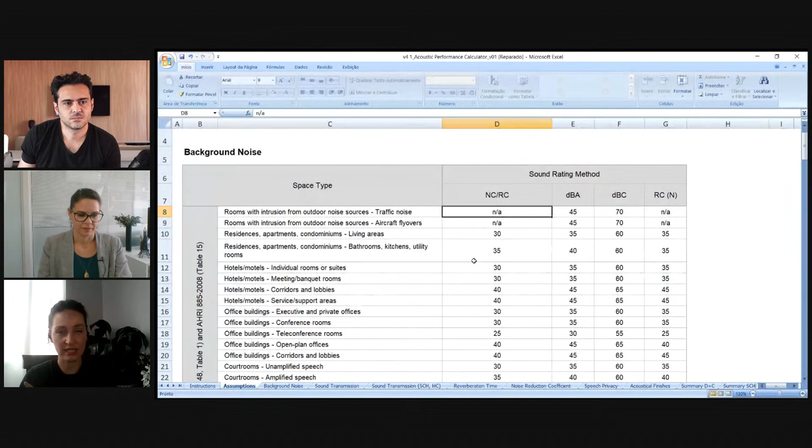So it gives you background noise, sound transmission, acoustic isolation. I'm going to go quickly through this tab so we can go on. Reverberation time, this is something that we are going to work with today. Speech privacy is related to reverberation time. And acoustic finishes, because it deals with the absorption or reflection characteristics of the surfaces. Acoustic finishes and the design coefficient, so they already give you this relationship with the type of space that you have.

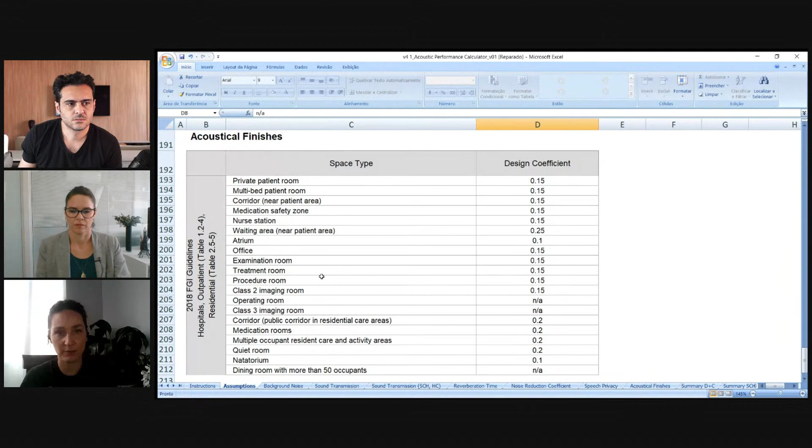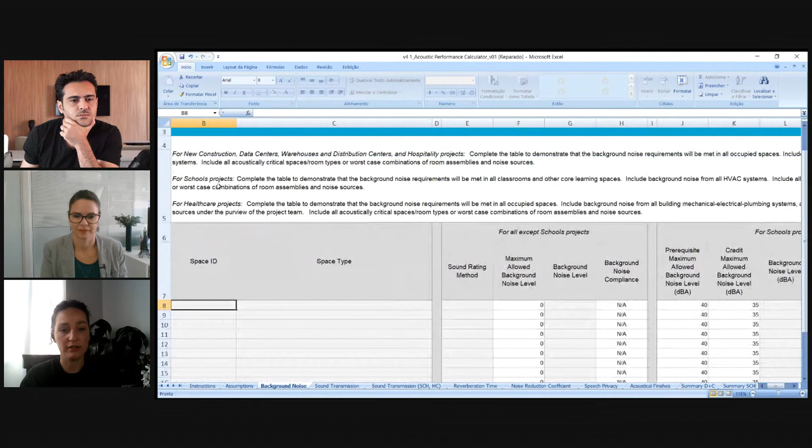So if you need some idea of what you're searching for, you can find it here. It's already in this calculator; you don't need to look further if you don't have to. And then we are going to talk about noise reduction coefficient. First things first, background noise. What is background noise? It's all the noise that you hear aside from the source that you want to hear. So it's the traffic, it's the air conditioning, it was that problem with Sammy's microphone, and so on. So this is background noise.

If you are designing in a place that already exists, you might want to measure the sound intensity in that place, so you can have an idea of the background noise. But if it's a new project and you are developing this along with the architects and the other teams, you can count only on the HVAC background noise if there is an HVAC system. And this is what I'm going to show you. Where do you find this information?

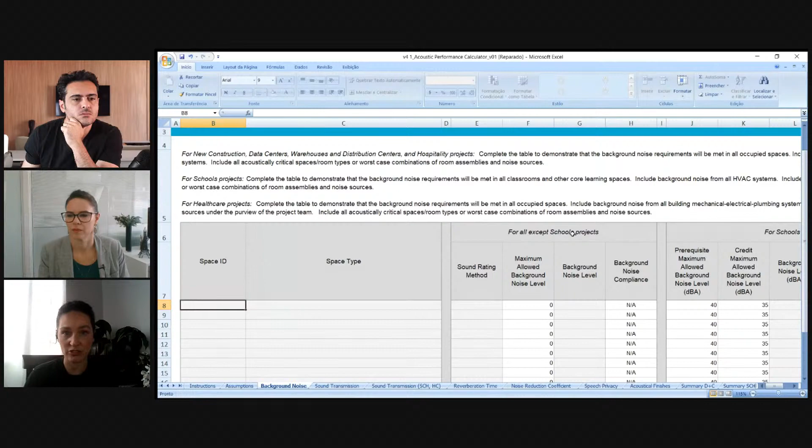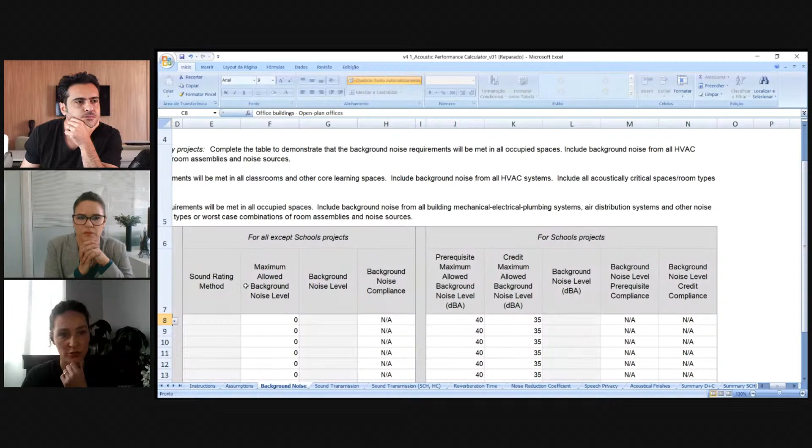So what we are going to do here, it asks for a space ID. So we are going to use Office 1, for example. What is the space type? The space type is office building, open plan office. So if we see it, we already have here some levels, but this is for schools. It has already filled in for schools, but not for the other projects. So let's move on.

Just to let you know, guys, right there where Tiziana chose office buildings, open plan office, usually when you download the calculator, you will see a drop-down menu with all the options. It's not appearing on screen because we're sharing the screen, so it doesn't show the same way for us.

But anything that shows there with the little arrow on the side, they will have a drop-down menu and you can choose from it, okay? So she is choosing from a menu. Yes, it starts with rooms with intrusion from outdoor noises and traffic noise to residences, hotels, office buildings, and goes to performing art spaces, hospitals, and laboratories, okay? I will describe it to you then because I wasn't aware of it.

You should share your screen itself, not the software. Maybe it will appear in the drop-down menu. Stop. Let's try again. Share screen.

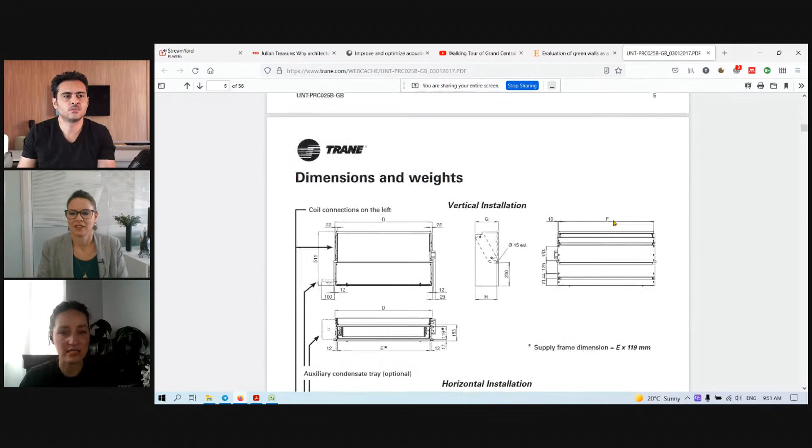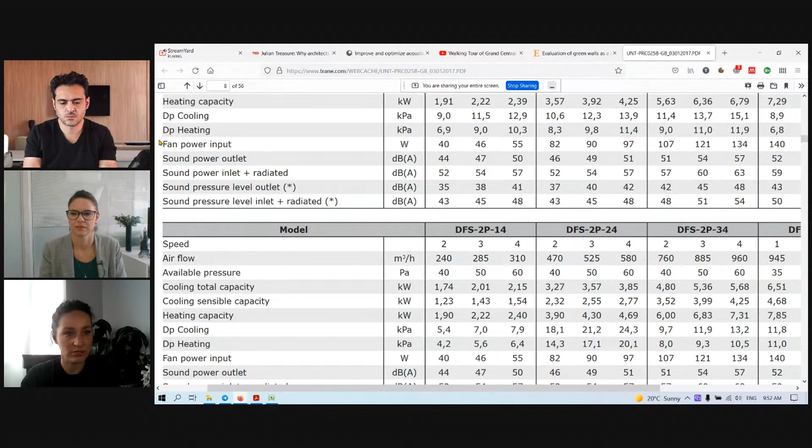Okay. So this is just an example of an HVAC system. Of course, you will have to talk to your mechanical engineer to see what type of unit you will need and the capacity of this and so on. But you see here, I'm going to make it larger. It says sound pressure level outlet. So this is the sound pressure that we are aiming at. It's in dBA, as I told you before.

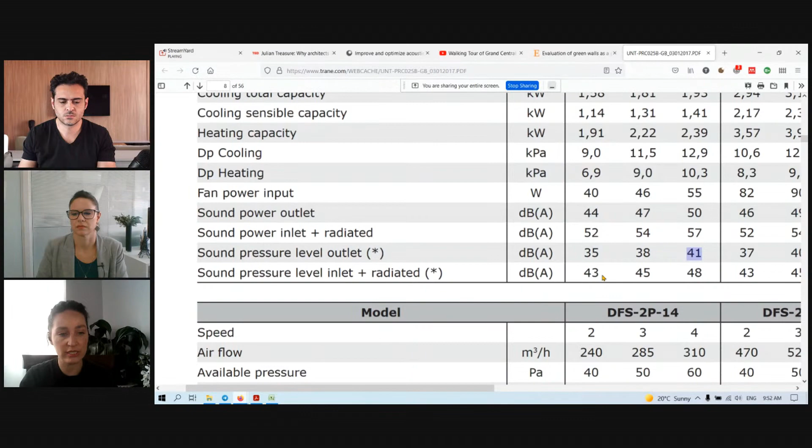And there are 3 types of units here, from 35 to 38 and 41. Okay. Let's choose 41 because we need a stronger unit, and we are going to put it here. Do you see my Excel file? Yeah. Okay, so 41, and it already says to me that the background noise is okay for that place. If it were 48, it says no, because it's too much background noise. It will make people uncomfortable.

Okay, so this is something important that you talk to the mechanical engineer about, because sometimes people are really concerned about thermal comfort and energy efficiency, and they don't think about the discomfort that that unit will cause to people. And when it's too loud, they will turn it off for some time because they need some peace at that moment, and then it will unbalance everything that was simulated and calculated before.

Okay, so this is one thing that you should have in mind. Acoustics is about comfort, it's about quality of life, but it also can unbalance all the calculations that you did for thermal comfort and energy use. Okay.

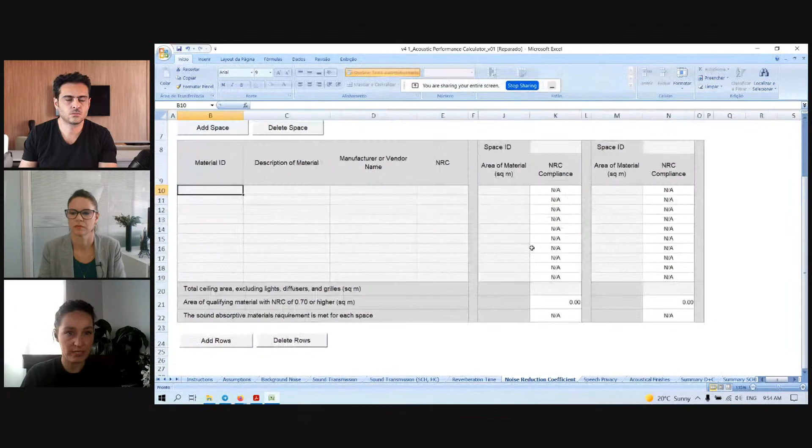Next thing that we are going to talk about is, of course, the noise reduction coefficient. We talked about the ceiling property. Okay. And this is where you put the ceiling characteristic. Okay, so you put here office 1. Is it okay to read? It's okay, yeah. Okay. And then you put ceiling X.

This is a mineral ceiling, and then you have the name of the product and the type of product, which comes from manufacturer X. And then you need your noise reduction coefficient, which is that average coefficient from all those frequencies that I talked about. Okay. First things first, we already know the area of the ceiling that we are going to apply. Let's say it's 49 square meters.

It can be less if you're doing a composition in the ceiling. It's all right. You just put more area, for example, 20 here, and then ceiling Y here, with 29. Okay, and then we have 49 square meters, and you can make this composition. Okay.

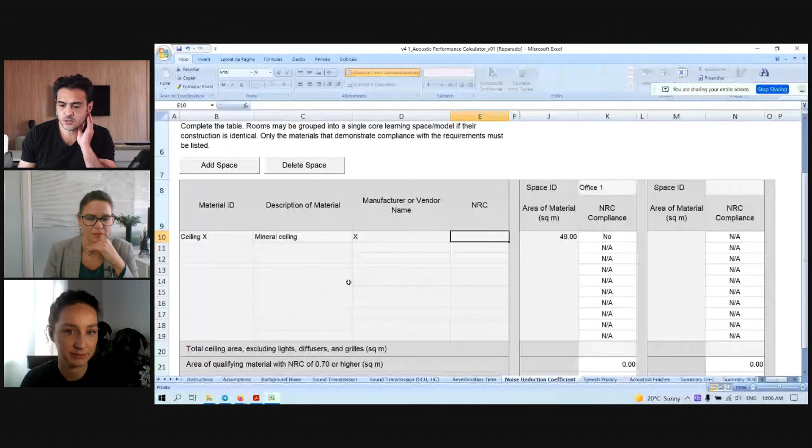All right. So while I share my screen here, Felipe, can you choose one NRC for our calculator? Do you want me to choose from this manufacturer? Yeah. Okay, I will choose the first one here because it's 0.75, so we have more chance to win the challenge, right? I don't want to be shameful to our students here. Okay. Do you see the calculator?

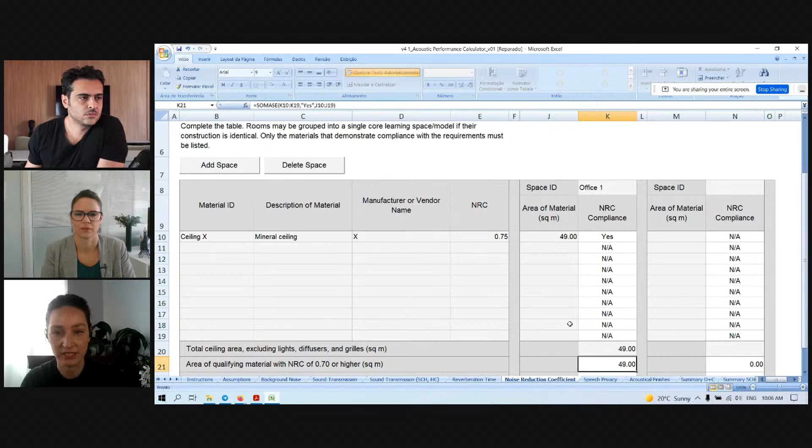I'm seeing, yeah, fine. Okay, so I wrote here the one that Felipe chose. We already had the ceiling area, and then there's something missing because it's not complying. If I put here the ceiling area, it says that it is compliant now. So I have the whole ceiling area with a good noise reduction coefficient, and the calculator is telling me that I will have theoretically a good acoustic performance in that room.

Why do I say theoretically? Because people are people. When we do energy simulations, thermal simulations, comfort, whatever, we are dealing with assumptions, right? So if someone puts a car outside with a subwoofer, then it's a little bit more complicated and hard to predict. Okay.

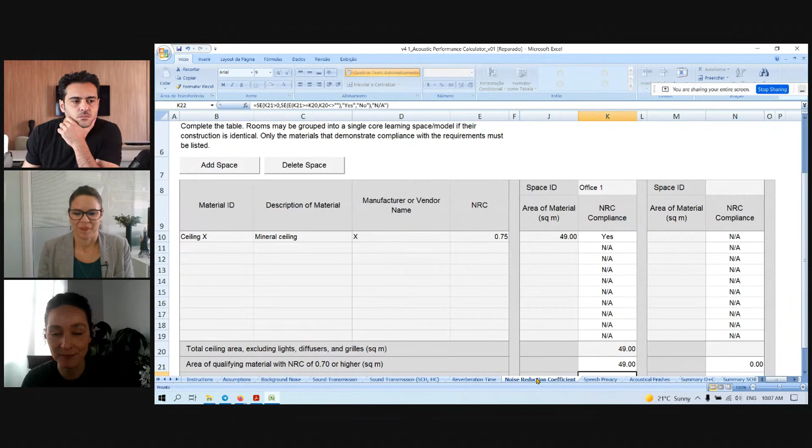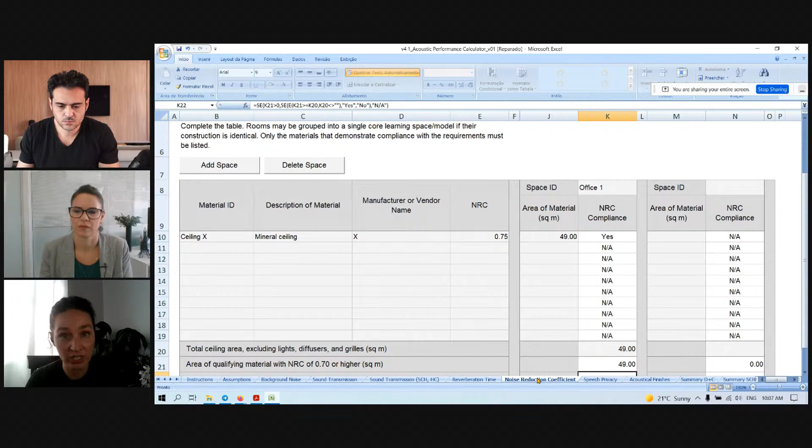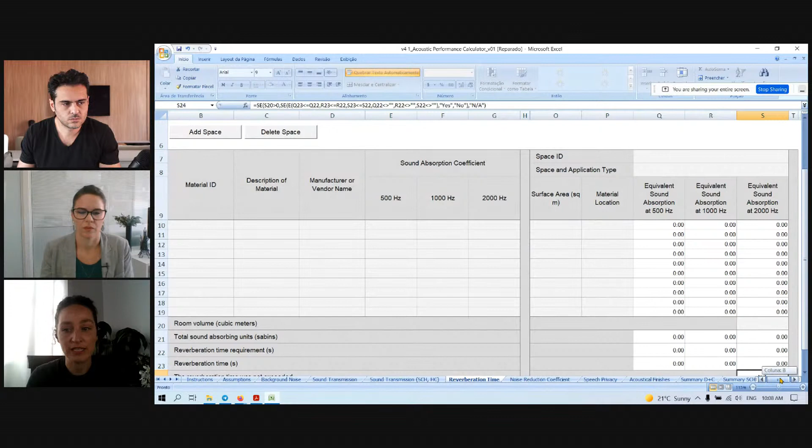All right. And then, as Felipe told you, maybe you have a larger room and maybe you have to deal with reverberation time. So how do we do that? There is a tab here for reverberation time. Okay. And then we already chose the ceiling, and we talked about how the NRC is an average of the frequencies. So we are going to put it here, okay? The ceiling.

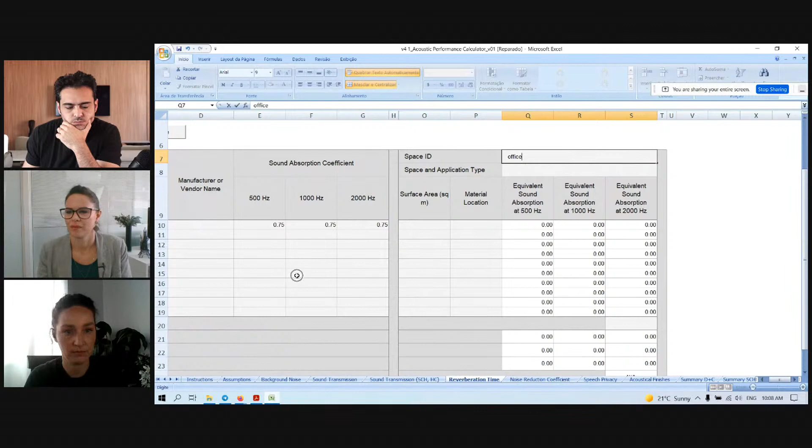And it says it's 0.75. It would be better to have the values for the different frequencies from the manufacturer, but if we don't, we are just going to put it here as an assumption as well. The space ID is the office. I'm going to zoom in a bit more. Okay, it's just that I have to have the whole picture here. Let me see if I can zoom in a little bit more.

Okay. So you have here the sound absorption of the material, with 3 different frequencies, and then the space ID, so office 1, and the application. You see the drop-down menu now? Yeah. Okay. So open plan without sound masking, because we want to provide this quality without any additional equipment. The surface area. Now we are dealing with the ceiling that we were talking about. It's 49, and the material location is the ceiling, okay?

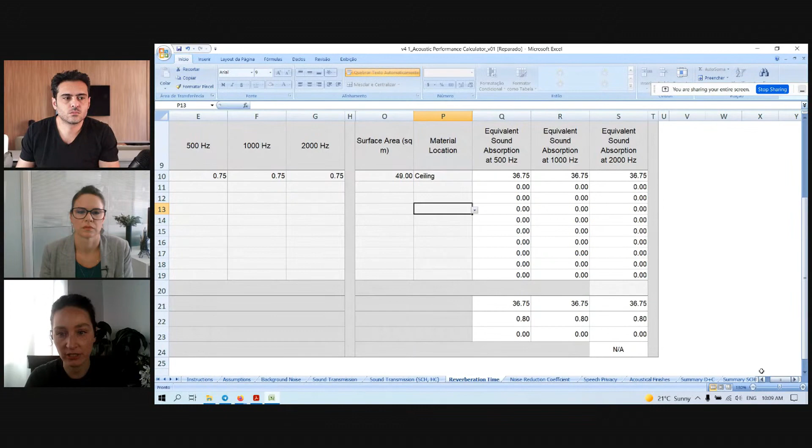So we have something missing here, which is the room volume. I told you that reverberation time deals with surface properties and room volume. Can you tell me the volume of the room? It's 9.8 meters by 5, and the height. Oh, you want me to tell? Let's see. This space is 9.8 by 5, ceiling height 4 meters, area 49 square meters.

And the volume? The volume is not appearing here. 49 multiplied by 4. Okay. So it would be 196. Okay. So we have here the reverberation time, right? Yes, thank you.

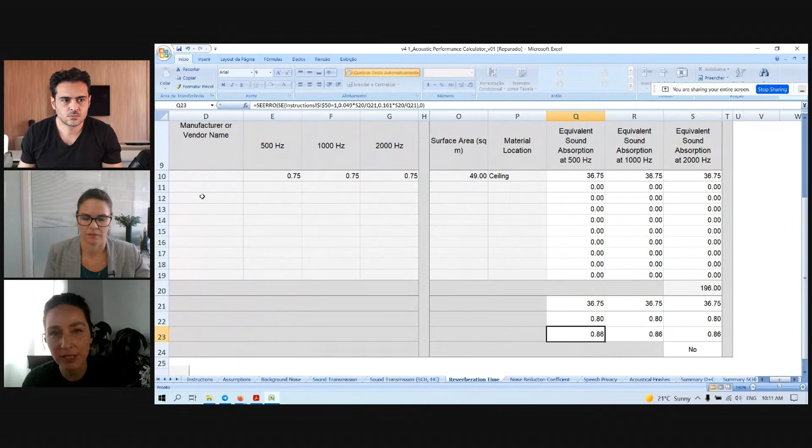The reverberation time that we are aiming at is 0.8 at 500 hertz, and at the other frequencies as well. And we are not achieving that, okay? It's actually higher. It's 0.86. So we need a little bit more absorption to make sure that the reverberation time is all right for offices. So let's use a wall here, okay? And let's say we are going to use something that is, I don't know, maybe I can show you.

I put a table. Felipe, can you show them? There's a table attached to the class planning. Choose a material and tell me the absorption coefficient. Okay, we have, let's say, concrete block, dense, painted. We have 0.06 for 500, exactly. For 1000 hertz, 0.07. And for 2000? 0.09, right? Yeah, because it's very reflective.

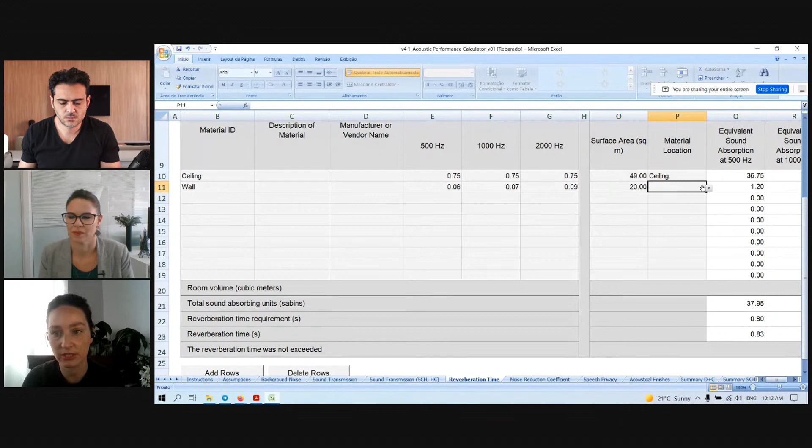The higher this absorption coefficient, the higher the absorption, okay? And then the surface area is going to be 20 because it's 5 multiplied by 4, which is the ceiling height. And then we have here that it is a wall, okay? And then it lowered just a little bit. Now we have 0.83. We had 0.86 before. Okay, so we need more absorption. The concrete blocks are not absorptive enough.

If we change here to another material, let's say something more porous. Let's see. We have carpet, heavy on concrete. Okay, let's add carpet. Then we're not going to deal with the wall. Do a composition with the whole room. So, for the people that were asking on the chat how do we calculate for the entire space, how do we calculate these compositions? You see that Chisi is making a composition right there.

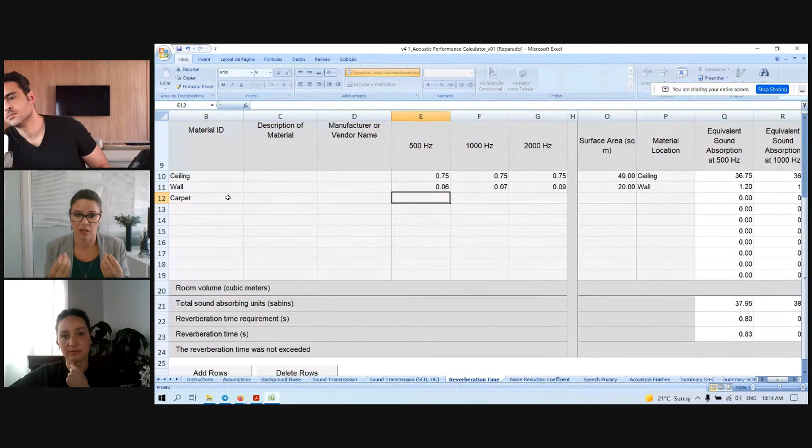She started with the ceiling because we want to use the ceiling as the larger surface because of what she mentioned before. It's a place where you will have lower chances of problems with dust accumulation because gravity works for us in this case. There is still maintenance to deal with those panels, but there's less chance of dust buildup creating problems with allergies, because these are porous materials.

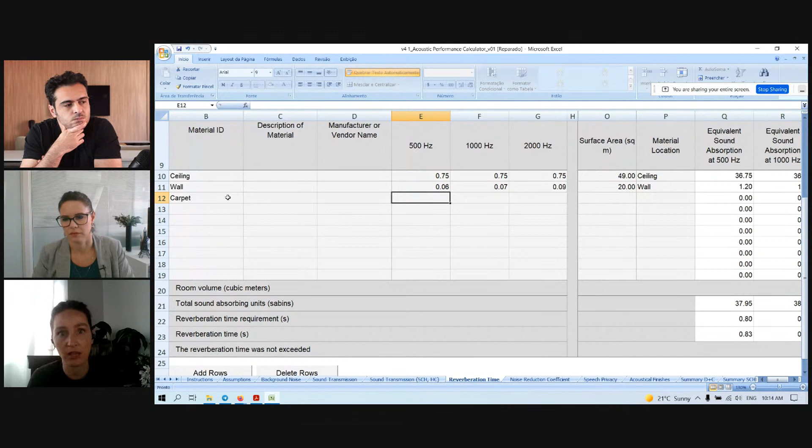And a very straightforward way of starting to think about this is to do your design as you regularly do, and then you get all the surfaces and put them in this calculator. And then you see if it's going to be comfortable or not. If it's not, then you will need to change some material to a more porous one, for example, so you can have a lower reverberation time. So you don't have to go too far from what you already do. You just have to check if all those materials are indeed going to give people acoustic comfort.

Okay. All right. I will share the carpet here. Can I show? Okay. So please. 0.14.

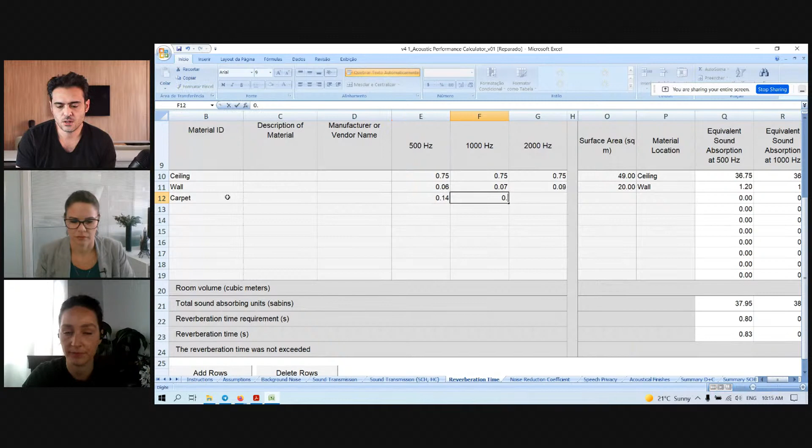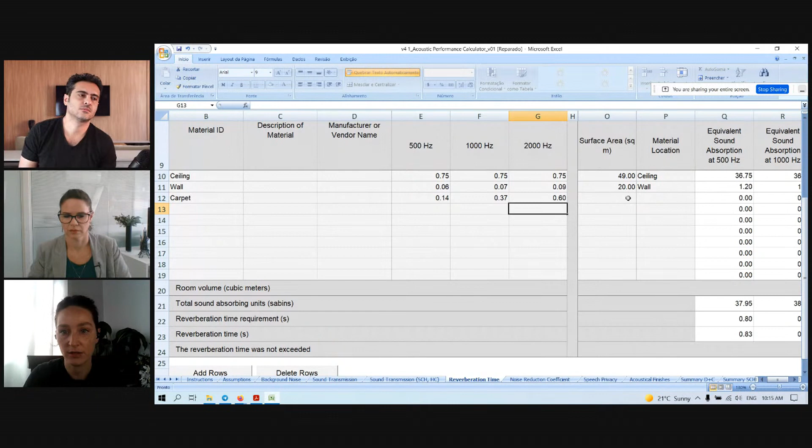Okay, so 0.37, 0.60. And we are going to use it on the entire floor. So it's 49 square meters, and we have here the floor.

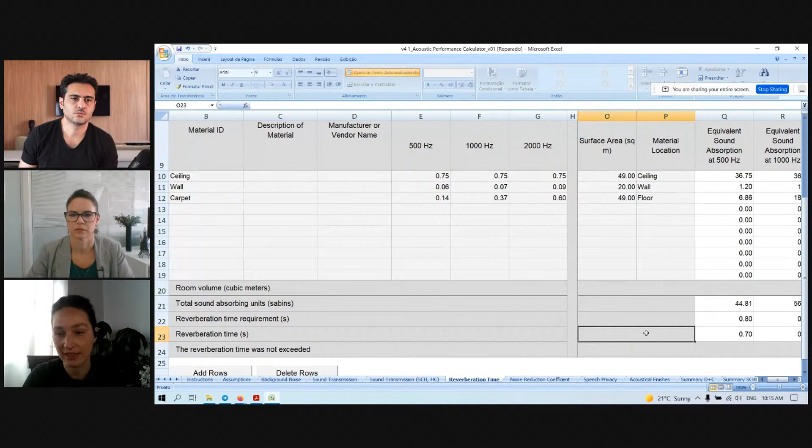Now you see that we have a lower reverberation time, especially for the high frequency of 2000 hertz, because it's very porous. So it deals better with those higher frequencies, middle and higher frequencies. So now we are achieving a good environment.

So it's just that you get the area of that material, and you put here as a composition with all the specifications from the manufacturer. If you don't have this specification, there are standards that already give you those coefficients, those absorption coefficients, so you can have an estimation of the performance of your design.

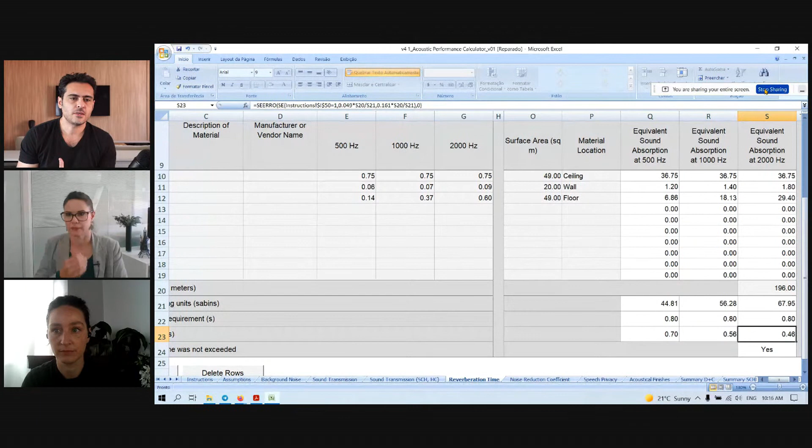Okay, just to mention something, what is comfortable in this space? So let's say this space is going to be, I don't recall, 0.7. What we are aiming at is 0.8, for all the frequencies.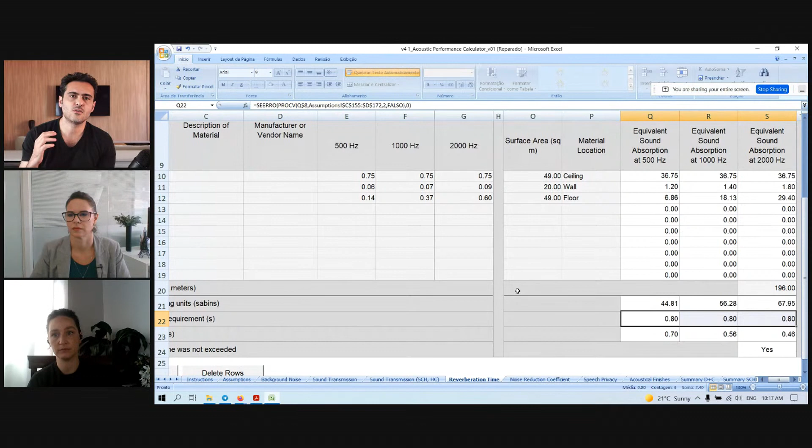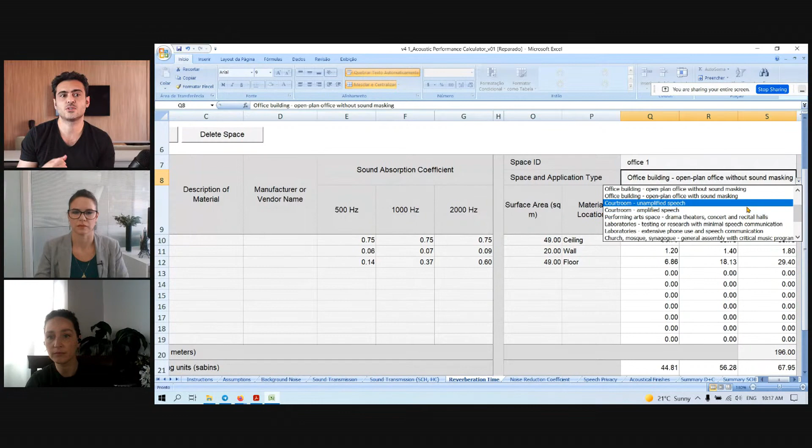So depending on the space you have, you are going to have a value to achieve. Usually when you have a classroom or a meeting room, you are going to need 0.7, 0.6, 0.8. And when we are talking about something big like a gymnasium, it's going to be 1.5, 2, or something like it. So the bigger the space, if you don't need to hear very well, you will have higher values. But if you're in a classroom and need to learn, you need to hear very precisely.

So this is going to be a lower value. You need to have things clear and understandable. The one thing that I want to share with you guys. Can I stop sharing now?

One thing that I want to share with you guys is that as interior designers, you have more of this complexity when you're thinking about acoustics. It's very complex to calculate. Some people mention that they try to do it by hand, and it's very time consuming.

So with this table that we showed you here on the Excel file, it is easier for you to compose these elements or to evaluate the room that you have designed for. But if you have a bigger space, usually you work with an acoustic engineer, a person that's actually dealing with this. It's a complex subject.

It's just like being with your mechanical engineer for air conditioning. For smaller spaces, understanding the basics and having these tools will help you calculate this yourself, and you'll be able to understand if your space is achieving this. But if you're dealing with complex elements, don't try to do this on your own without consulting someone who is qualified for this. You don't want to jeopardize it.

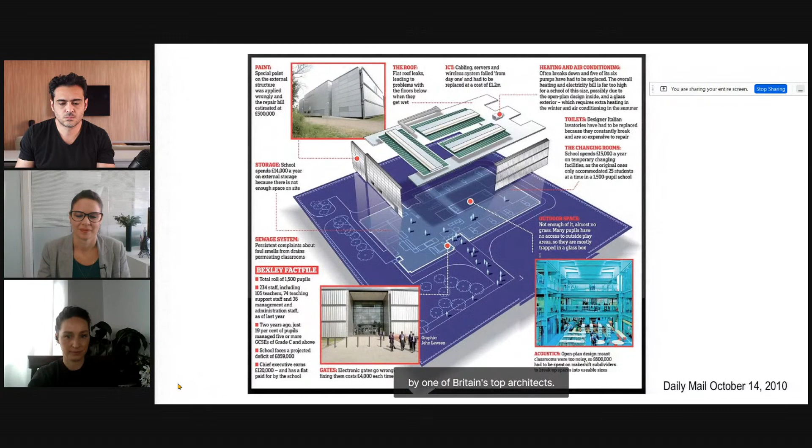Here's a case in point. This is a £32 million flagship academy school, built quite recently in the UK and designed by one of Britain's top architects. Unfortunately, it was designed like a corporate headquarters with a vast central atrium and classrooms leading off it with no back walls at all. The children couldn't hear their teachers. They had to go back in and spend £600,000 putting the walls in. Let's stop this madness of open plan classrooms right now, please.

It's not just these modern buildings which suffer—old-fashioned classrooms suffer too. A study in Florida a few years ago found that if you're sitting where this photograph was taken in a classroom, row 4, speech intelligibility is just 50%. Children are losing one word in two.

What I'm trying to show you here is that there is a decrease of quality in the sound, and that it can be really serious in those spaces. If you can, watch this TED Talk later—it's really important, it's really interesting, and the speaker deals with exactly what we are dealing with right now.

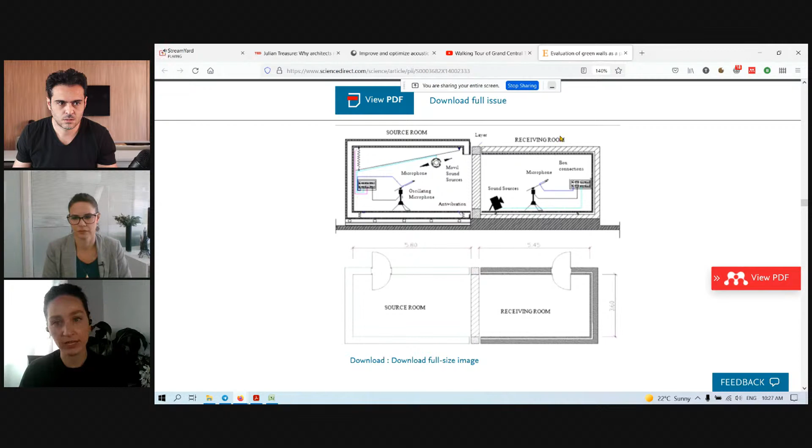So they had this wall between the rooms—we have the source room with the green wall, and then the receiving room for the isolation test. And what I want you to see here is the results.

So here we have the sound reduction coefficient, and the green wall wasn't really good there. But I wanted to show you another one—the sound absorption coefficient. Do you see the green wall, this light green here? Let me increase the zoom.

You see that in the lower frequency range, it works better than any other material. When it goes to the middle frequencies, it loses only to the fiberglass board, and in the high frequencies as well. So it's a really good absorption material. If you have a green wall in your office, in the indoor environment, it works really well—it gives people biophilic design.

It gives people a biophilic feeling of being in touch and close to nature. But it also helps with the acoustic properties of that area. So for interior design, green walls are really good.

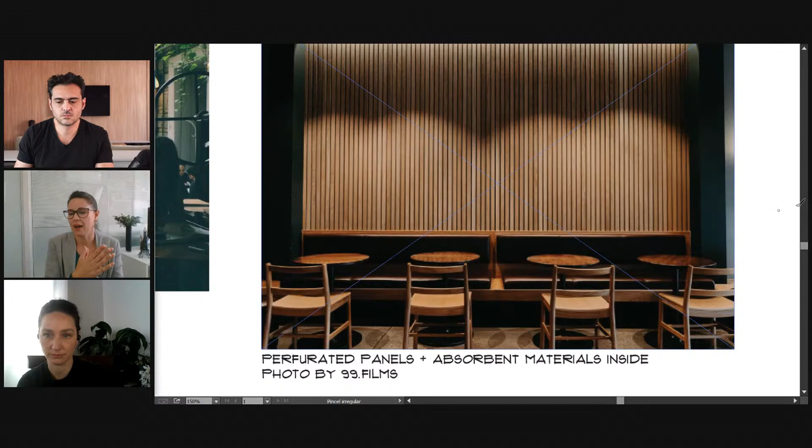So when you see a panel like this, and there is absorbent material right behind it, you have to understand there's maintenance, there's air quality, and this awareness of what you're doing with the space is to maintain. Like TC has mentioned many times before and yesterday, if people cannot get used to it, or if this space is not working for them, they will change it.

So if you put those wooden panels, if you put that absorbent material behind it, and it is too difficult for this person or their lifestyle to maintain it well, and it starts to look dirty and starts to degrade this space, they will replace it, and they will not ask you to come and replace it. They will probably do something that will decrease the acoustic properties or the isolation property, or whatever it is that you intended for the area.

So it's very good to have an interview with your client when you're talking about the purpose of the spaces. How do they do their maintenance? What is their daily routine? So you can incorporate that into your decisions too.

So we have many sustainable materials that you can use in acoustics. And one good place for you to check is the Cradle to Cradle products library. You will have materials that are certified, or some companies, but we're talking here worldwide, and not many places will have materials that have been certified by Cradle to Cradle or that are attested.

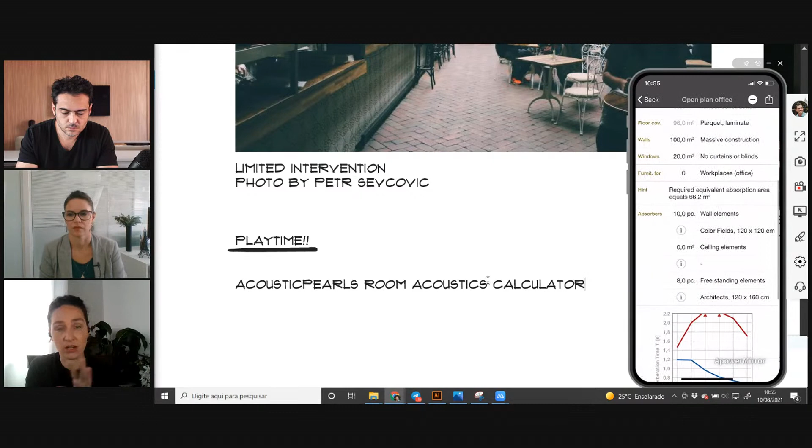Well, one important thing to have in mind is that this is an app from a manufacturer. So the products that they suggest are from their product list. What we are suggesting to you, if you are going to use this app wherever you are, is that you have the specifications of those materials. And then you can use that as a basis to choose your materials in your area, regardless of the manufacturer. Okay, so you can have the absorption coefficient that you know works because you ran it through the app, and then you can search for a similar product where you live or work.

Yeah, I'm changing the types here of freestanding elements or seating elements, and when I put more, of course, I will make the reverberation time better. I'm putting more here, so I'm making it better, right? So let's put here 20 or something, so I make it better. But when I remove, I can see, right, I make it worse. The blue line here is getting up. We don't want this to happen, but let's do this. Let's remove this, 0 0. So we remove this. The blue line equals the red line, but let's put again 30 here, and let's put 30 here as well. So I dropped down this blue line.

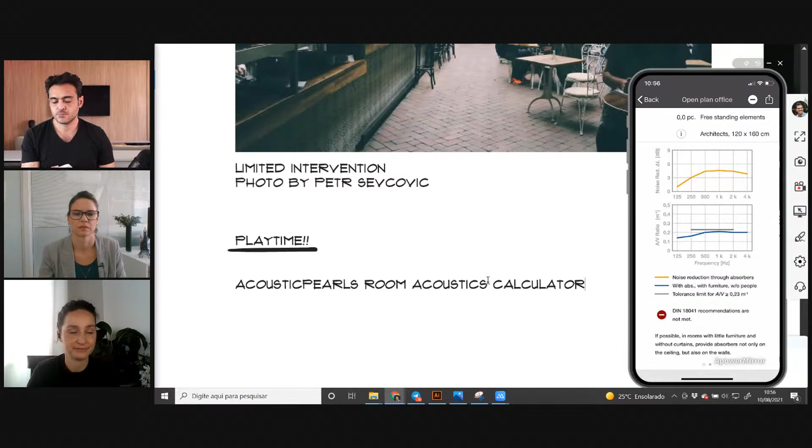So this is a very straightforward software that you can use in your projects. Okay. So I just wanted to show you this, and you can use this in your projects as well. All right. Yes, you will have time to play now with the Excel calculator and the app. Yeah. We just gave you 2 tools today to make acoustics easier and not to make acoustics the underdog anymore. So let's use that.

And guys, just to conclude our class, we wanted to have something in mind. First, what Sammy told in the beginning of the class, and we also mentioned the whole time here: if people are not comfortable, they will change the environment. That means more energy, not only operational energy being used, but also the materials. They will change the materials, and that includes wasting resources. So we don't want that. Okay, this is why we have to be careful about acoustics. Also, it's about quality of life. You don't want to be more tired at the end of the day than you would be because of bad acoustics, right? And also because of what Sammy said at the beginning, this can also have heart disease implications.

But we talked the whole class about absorption, about lowering the reverberation time. But sometimes you do want a longer reverberation time. And this is when you want liveliness in your room. So depending on the atmosphere that you are creating, you want more reflection and less absorption. This is when you have, for example, places where the amount of people create a movement, or when you want people to feel that they are part of something bigger. Okay, so this is why you have big reflective lobbies or common areas in universities. They are symbols of innovation and resistance. And when the students are gathered together, they create this atmosphere. Okay, something's going on. So this is important. You want reflection in those spaces.